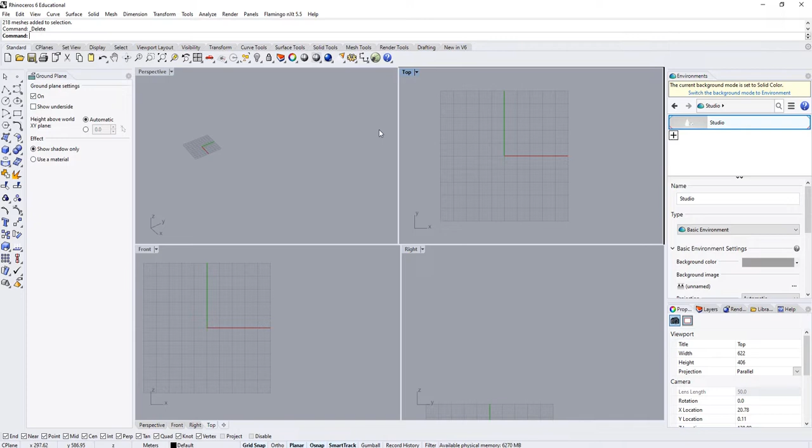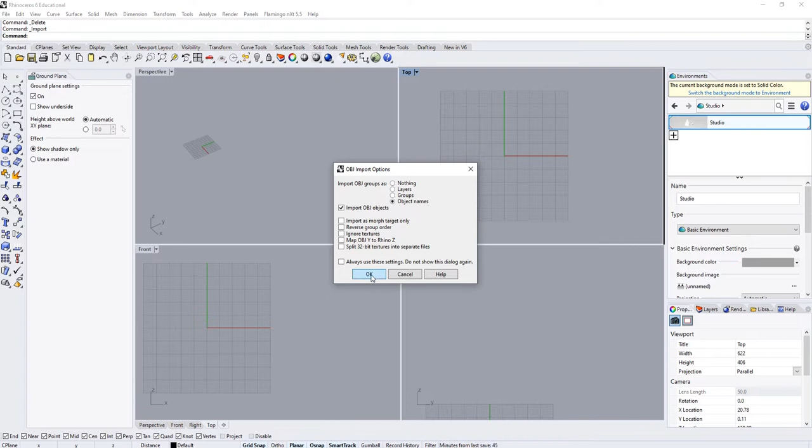So first off, we're going to start by importing everything that we just worked on in SketchUp. So we're going to go up to File. We're going to scroll down to Import, and we're going to pick the one that we just saved out. So I'm going to pick this one. It's the object file. We're going to go ahead and hit Open. Import objects. Very good. Object names. Awesome. We'll go ahead and hit OK. Great. So that just imported everything.

We can see the view is a little bit warped, so no worries. We're just going to be able to use a rotate to fix that right up. I'm going to also recommend having ortho mode on right now, just because we want to make sure that any rotation we're about to do here is a nice 90 degrees. So ortho mode right down here, we'll click and make sure that that is on.

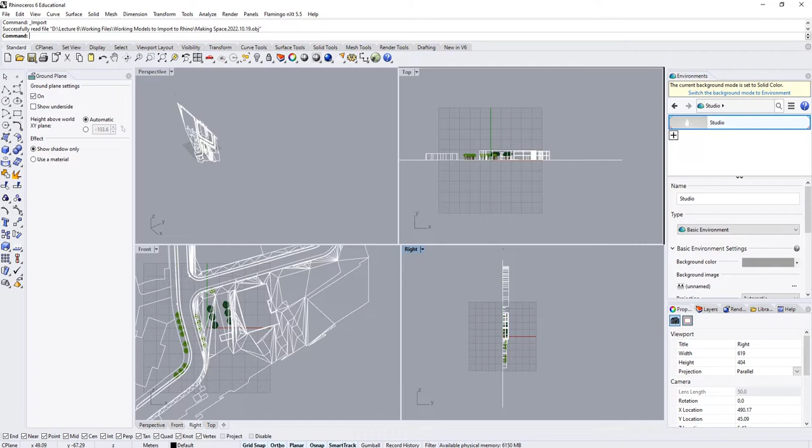So we're going to left click and drag over everything. We're going to zoom in. We're going to pick ROTATE and hit enter. And we're going to pick a point on the y-axis here, I guess, in the right view. And we're going to left click. And we're going to specify a point way out here.

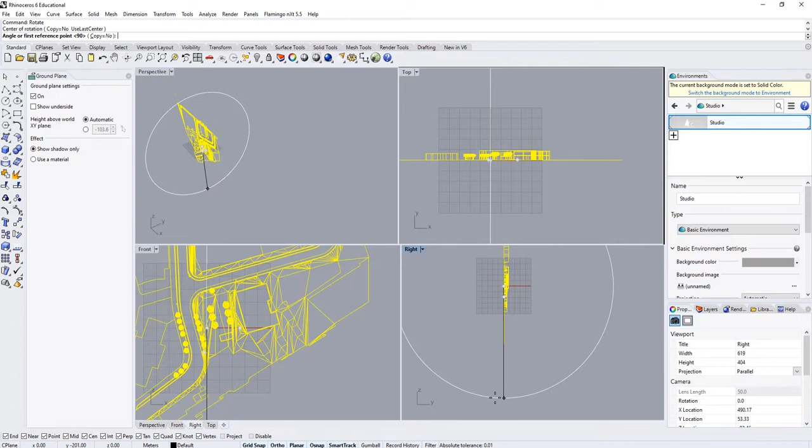And again, this is where having your ortho mode on is going to be really valuable, because you're going to stretch out and make sure you're along that axis, because you want to make sure you're grabbing everything and making it so that when you rotate it, it's all rotated and it's flat. So we'll scroll out here, we will left click, and we're going to drag, and just like that. See? Ortho mode, very valuable right now. We're just going to snap it right up like that so that it is flat on the ground plane.

Wicked. Now, before we go any further, we're going to play with our workspace a little bit. And I know that everything I just threw at you guys before, jumping around different views, is a little bit hairy and tricky at times. So we'll make a point of going through that nice and slow this time. So I'm going to suggest putting your right view at the top right portion of the screen and your top view at the bottom.

Okay, great. So once it's all tricked out like this, I think we're ready for the next step. And we've already checked and made sure that our project is in the correct units, meters. Yep, okay, we're good to go.

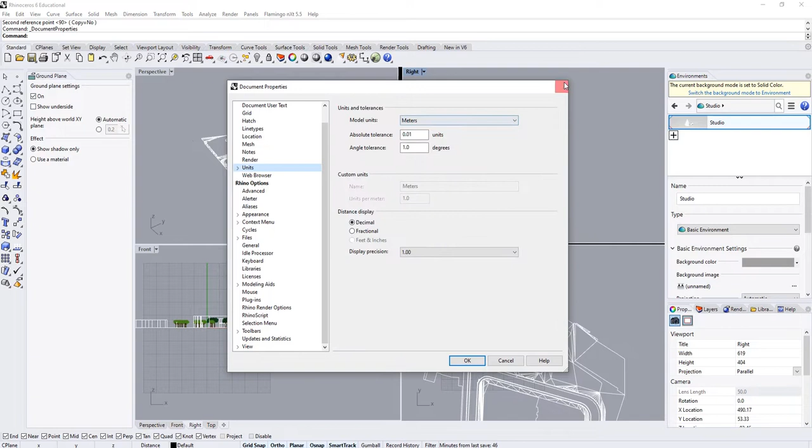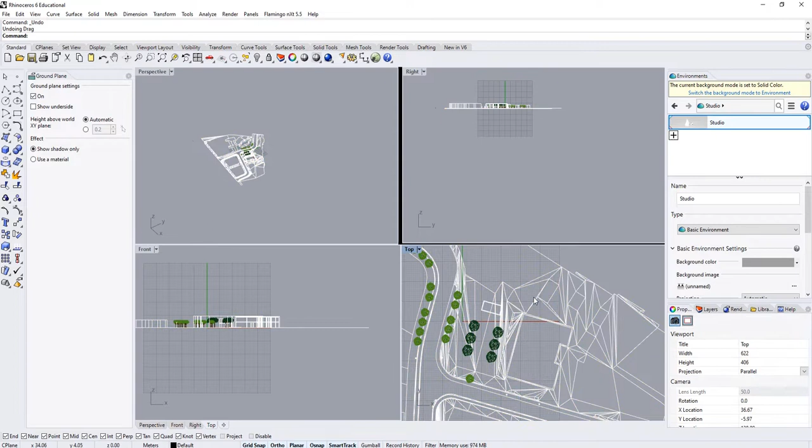So the first thing that we're going to make sure that we do here is this section that we're cutting through. Let's say that we want to create a section oblique that's essentially going to cut through this piece of the building here. The idea is we want to make sure that is congruent with the x-axis here in our top view. So we're working in the top view right now. This line here, or this face rather, needs to be congruent with that axis.

So what we're going to do is we're going to scroll out. We're going to left click and drag over everything. And the first thing we're going to do is we're going to make a move. So we're going to pick M for move, M-O-V-E, and hit enter. We'll go ahead and grab any point that essentially shares a wall with what we're going to try to be coplanar with. So we'll pick this one.

We're going to drag it up, and we're going to make sure that we're dragging it so that it is sitting somewhere on our x-axis. So we will left click. Perfect. So now this point is touching. Now we just need to rotate it so that this face is concurrent with this face. So how are we going to do that?

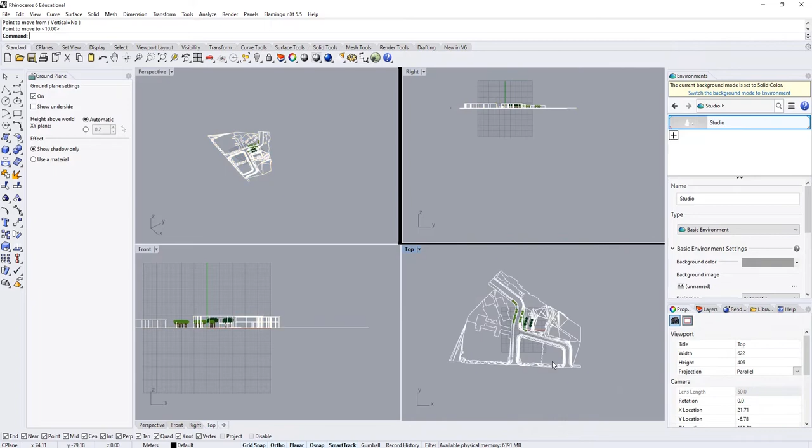We're going to left click and drag over everything. We'll zoom in. We're going to punch in rotate, so R-O-T-A-T-E, and hit enter. We're going to pick this point right here, because that's what we want to rotate around. So that's our center of rotation, just like the command line is telling us. It's asking us for center of rotation. So we will pick it.

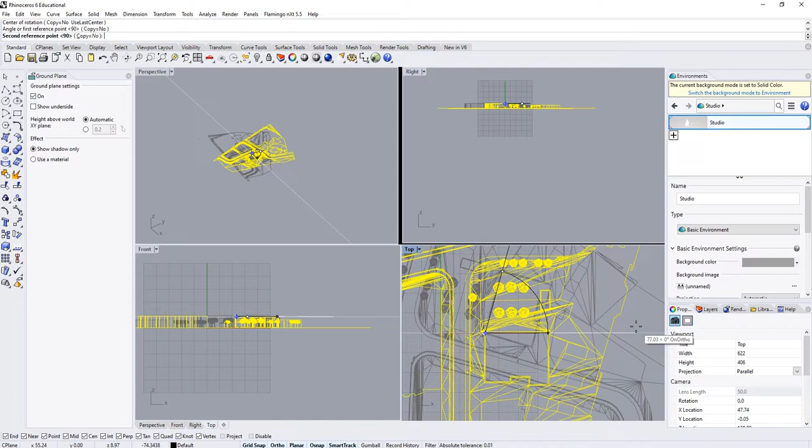We're going to scroll out. We will pick this other point here, because again, this is what we want to have meeting that axis. So we will left click and drag all the way down here. Perfect. And again, having your snaps on is really going to be useful at this stage, because as you can see, thanks to ortho mode, we're snapping right to that axis. So we'll tap left click.

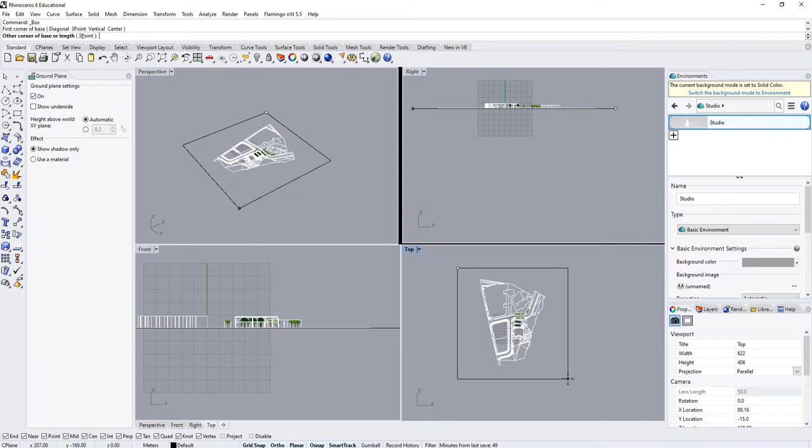We'll tap left click, and we're going to specify our two corners of our box. We're going to make sure they are essentially encapsulating all of our work inside of our project here. So we will tap left click, drag our cursor outwards so that it's now encasing everything inside of our imported model. We will tap left click once again.

Then we're going to scroll upwards once we're in our right view or front view, and we can see that we're going to give this box some actual volume. So we will tap left click. Again, it doesn't need to be sky high, it just needs to be big enough to encase everything that we've got here. Great, we've now drawn it so that it's big enough.

We're just going to go ahead and shuffle it down a little bit so that we want to make sure the ground plane of our model is handily within our box. So in order to do that, we're just going to go ahead and pick this box we've created.

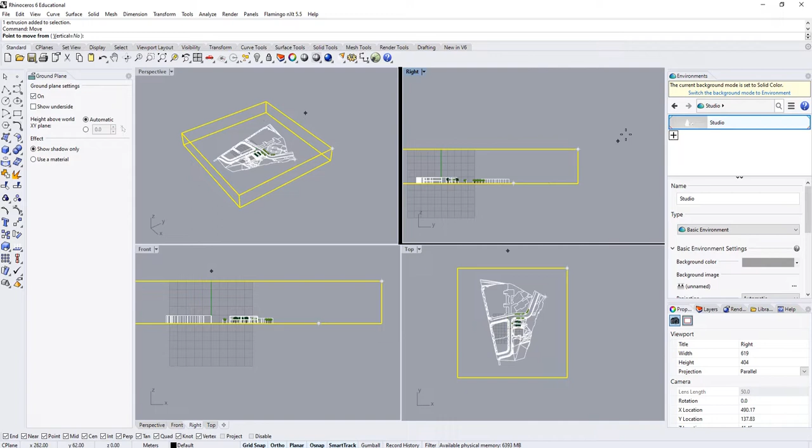We're going to tap MOVE and hit enter. Because you don't want to snap to anything you don't want to snap to, we want this to just be a nice vertical move. We're going to pick anywhere out in space here, it can be out in the front or right views. We're just going to make a point of picking a spot, and thanks to our handy ortho snaps, we're able to drag our cursor, and it'll be a nice vertical move that's straight down about this right projection. So we'll pick left click.

Great, we'll zoom in here. He doesn't need to be in here. Okay, great, so now we've got our model, and we've got it inside of our box.

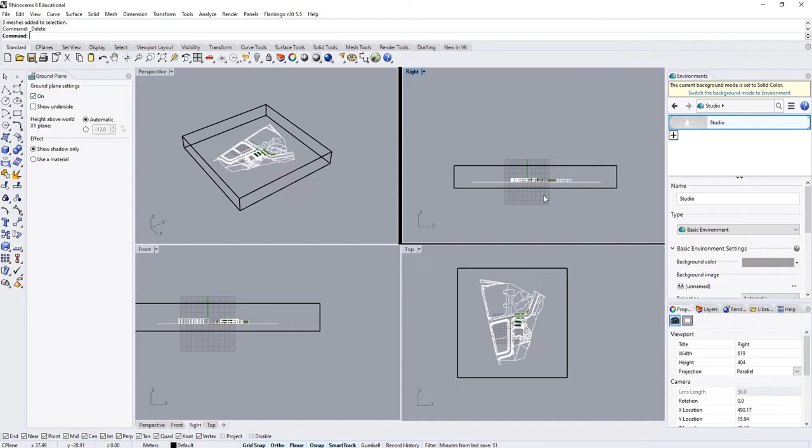Great, so right now we've got this in wireframe, so we can see all the stuff we want is inside there, so that's great. We're going to left click and drag, and we're going to group all of this together so that we'll be warping the whole mess of stuff as one. So we'll punch in GROUP and hit enter.

And now, if we try to select it, we see, oh great, that selects everything. That's perfect, that's exactly what we want. Okay, let's move over to our top view for a sec here.

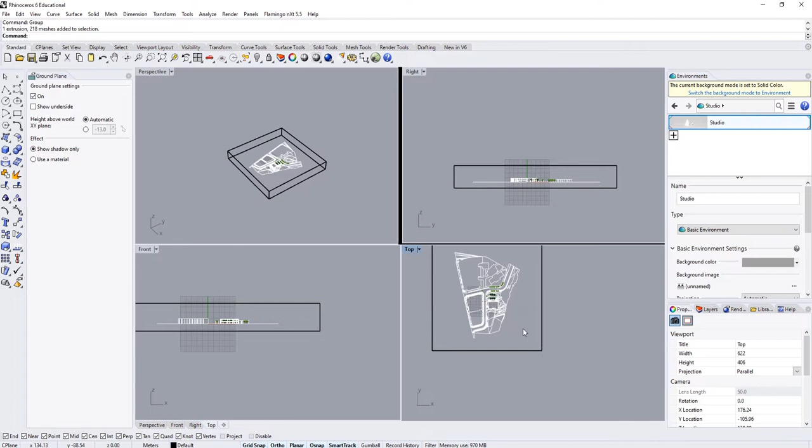So we're in our top view, and now we're going to chat about scale 1D. I know this is where the shearing and scale can get a little bit weird, so I'm going to try to go nice and slow. Again, anyone gets confused, just call out and we'll figure it out.

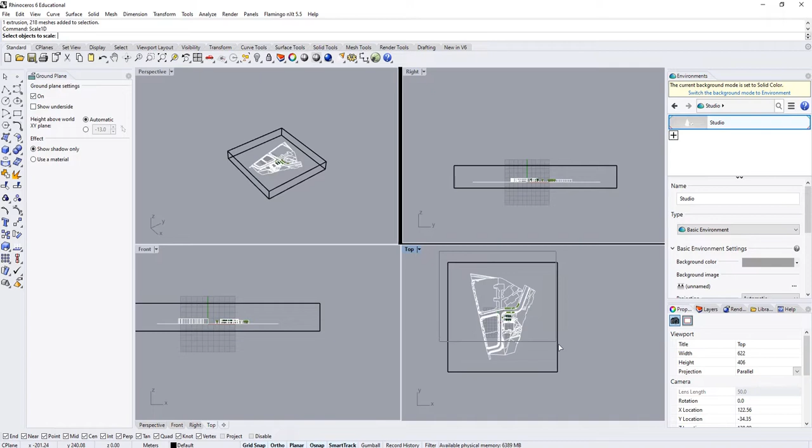So, in top view, I'm going to punch in scale 1D. We're going to hit enter. It's going to ask us to select our objects to scale. This is what we want to scale, so we're going to left click and drag over everything and hit enter. Now it's going to ask us to specify a base point.

I know this is where it's really, really valuable to have both your top view and your perspective view that you can look in. Because when I move over to my top view, I want to select the bottom left corner, but I see that I'm not actually selecting the bottom left corner if I pick this. I'm picking the top left corner rather.

So that's where, again, when I'm moving my cursor around in top view, if you guys look over in perspective view, are you able to see the cursor as it's moving around there too? Right, so basically the idea is our cursor's moving in 3 dimensions.

We want to make sure we're picking from the right spot, so we're not going to pick from this view. We're going to move over to perspective view and make sure we're for sure grabbing from the bottom left corner. We know it's the bottom left because we can see in top view that's the right spot. We're just now grabbing the bottom of the box. Great, that's exactly what we want.

Left click to pick. So once we've got that picked, we're going to swing our cursor right back over to the top view.

But now, before we do anything else, we're going to go ahead and give it our scale factor. I know one of the worst answers to any question is 'because I said so,' but 0.7075 just happens to be the number that allows you to do things at a good scale factor when you're working in meters. I'll make sure that's available to you guys for when you're trying it later on.

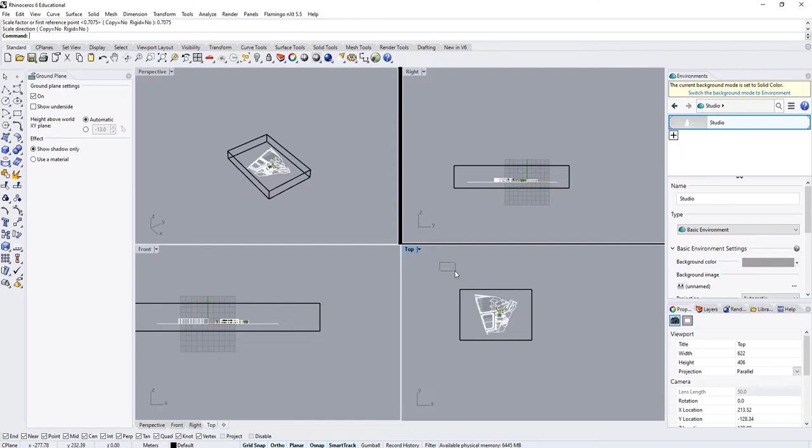So that's step one done. Now we're going to stay in our top view. Here's where we're going to get into the first shear command. So what we're going to do is, in top view, make sure all of our work is selected. Now we're going to punch in SHEAR and hit enter. Okay, so we've got the stuff we want to shear selected, and we've initiated our shear command.

Now it's going to ask us to pick our origin point. We're in top view right now, and we're going to opt to pick this point right here. But once again, it's going to be the bottom corner that we want to grab from. So again, we're in top view - yeah, that looks pretty good. But then when we look over in perspective view, we see that's actually grabbing the top corner, and we want to make sure it's grabbing the bottom corner.

So we're going to move our cursor up to perspective view. We're going to drag it down, and make sure that, yep, that is in fact the corner we're grabbing from and shearing from. So does everybody understand moving their cursor from the top view over to perspective and picking the point on the box based on that? Okay, cool. I know that can be a lot to get your head around, so if I'm going too fast on that, I do apologize.

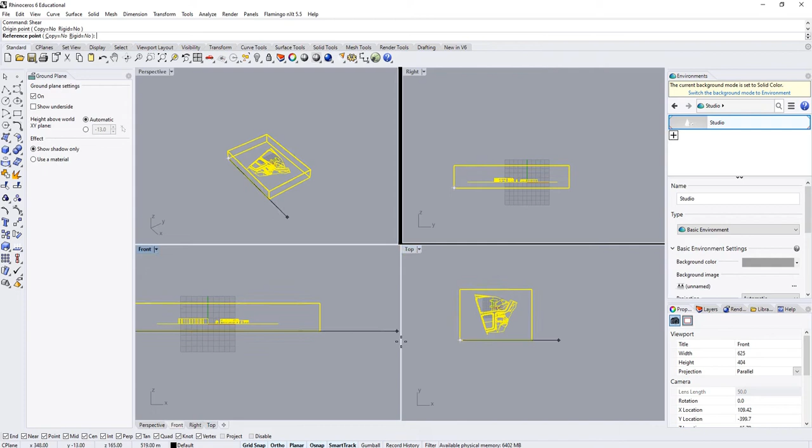We're going to drag our cursor upwards once again. Grid snaps and ortho mode are really going to be your friend at this stage. We're going to go ahead and pick it. And now here's where I'm going to suggest we turn ortho mode off just for a moment.

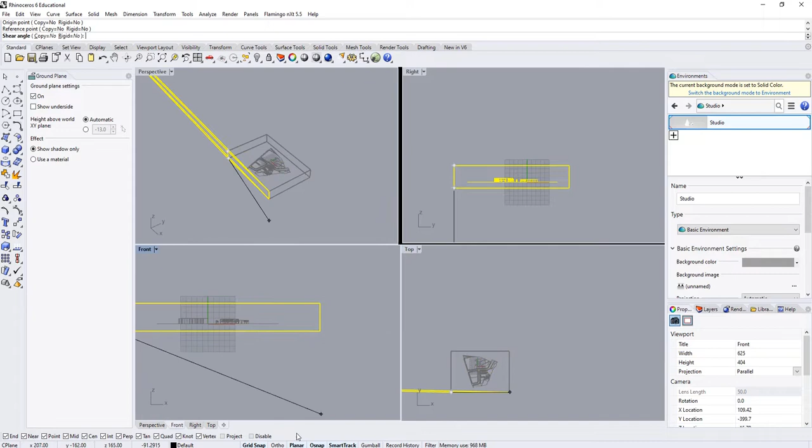And just as you can see, the way I did that is I just moved my cursor down here, and I literally just selected it once and then selected it again so it's no longer highlighted. Now, again, we're in top view. We've now specified what we're going to warp it about. Here's where, if you move your cursor to the left or to the right, it's shearing it around that specific corner, that bottom corner we just picked.

So here's where I'm going to specify a shear angle so we're not just shearing it at some weird angle. It's a very specific 45. The way I'll do that is by punching in 4 and 5 in the command alias, or in the command bar, and hitting enter.

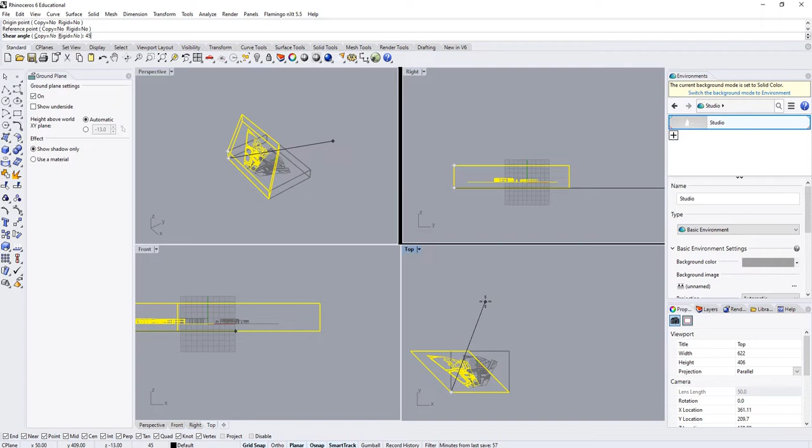Did that first shear make better sense now? Is anyone still horribly lost with the first shear step there? Okay, great.

So again, I know it doesn't really look like much of anything right now, but here's where we're going to go over to the right view, and we're going to do another select all. Again, we're just going to left click and drag over everything.

Now once again, we're going to make sure we're picking the lower left corner here. So we're going to punch in shear one more time, SHEAR, and hit enter. And we're going to drag our cursor.

As you can see, what you can see in the right view, you can see in the perspective view. So we're grabbing the bottom left from where we're being projected over in the right view, and we can tell it's at the bottom from our perspective view, which is great. So we'll pick that point.

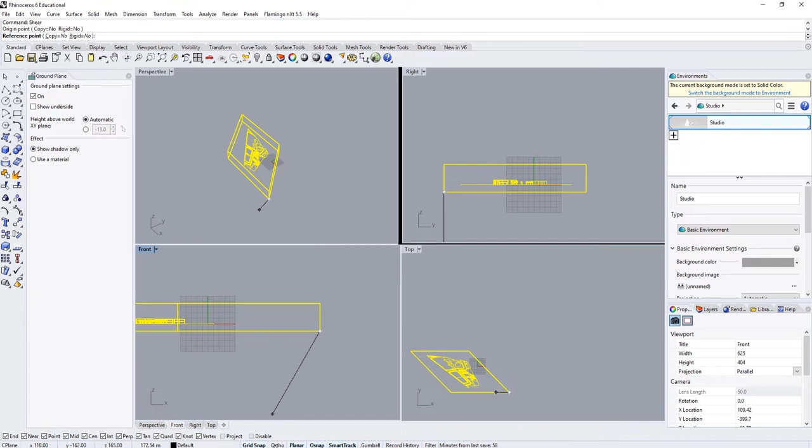We're going to tap left click and drag our cursor upwards. You can turn ortho mode back on just so we get that nice 90-degree snap. Alternatively, if you don't want to turn ortho mode back on, you can just hold shift down, and that automatically turns ortho mode on for you.

So then we're going to drag our cursor upwards so it's at a nice vertical line that is congruent with the Z axis here in the right view, and we're going to tap left click. As you can see, now it wants to shear for us again, now that we've specified that point. It's just doing that shear for us in the right view.

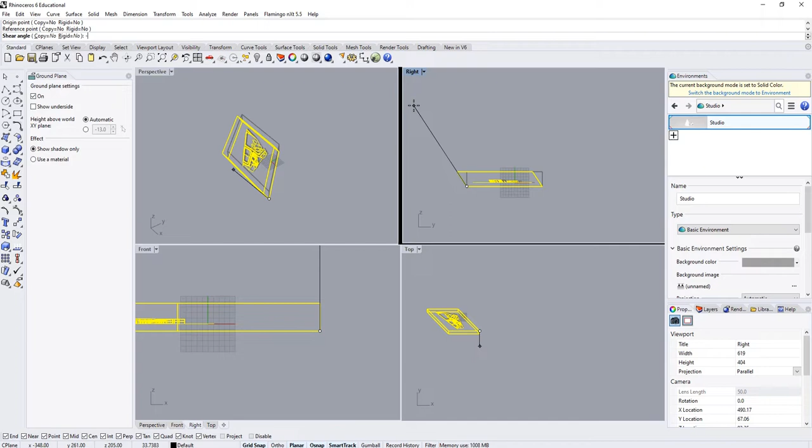So now if we punch in 45, minus and then 45, we're going to see, okay, that looks very ridiculous and crazy in the right view and the perspective view. But if we zoom in on our top view, we see, yep, that has now successfully done all of the warps that we want and shears in order to get us into

essentially an elevation oblique. So far, is that sitting a little better with everyone now? Okay, I see some nods. Wicked, awesome, good stuff.

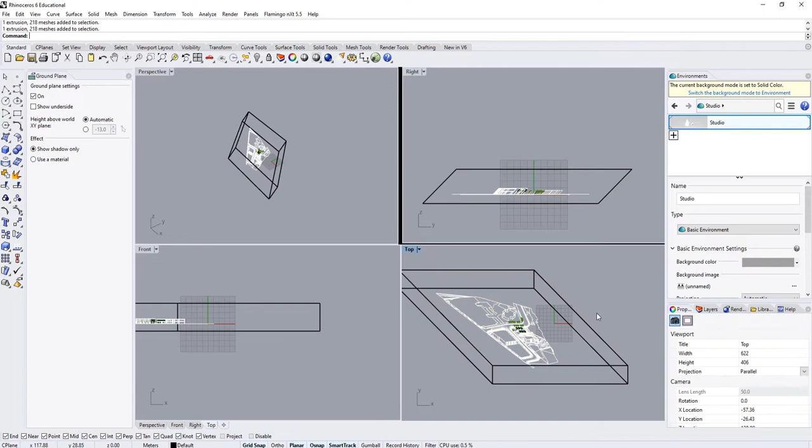So we're going to ungroup this box, and again, like the groups that we make, they're not permanent. Rhino knows we're just doing it for the sake of organization, so we will select this whole mess, and we're going to punch in ungroup in the command line, UNGROUP, and hit enter. Now that this box has served its purpose, we can just go ahead and delete it. So we'll select the box, delete, and it's gone.

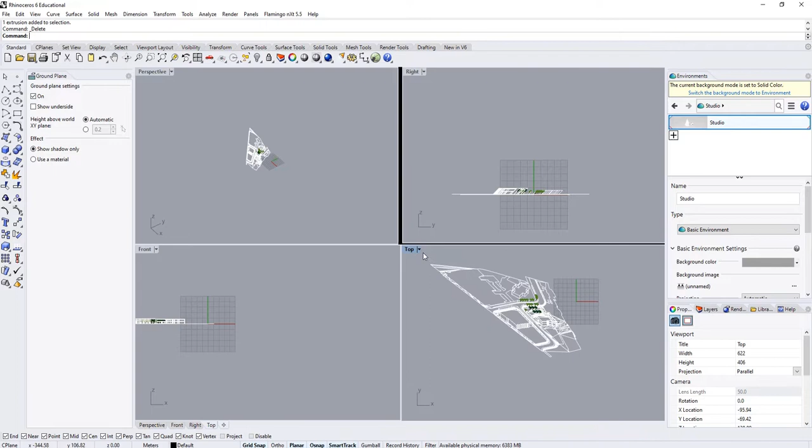So everything's looking good, but now it's time for us to take all this and essentially make it a series of 2D lines, so that we have something we can work with in CAD and then fix up later on in Illustrator. So we're going to do a left click and drag over everything, select it all, and then we're going to punch in make 2D and hit enter.

And yeah, sure enough, we're in view top, that's great. And projection, parallel, that's all good. That's what we want right now. And then we're going to move our cursor down to OK, because if your screen is somewhat matching mine, we're in good shape. So we'll go ahead and hit OK.

It'll take a minute or two to chew through that. And my video is still recording, good. Might take a minute or so, but no worries.

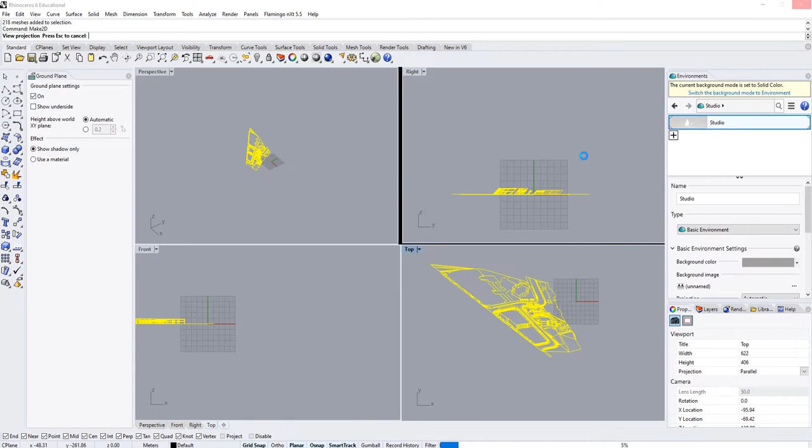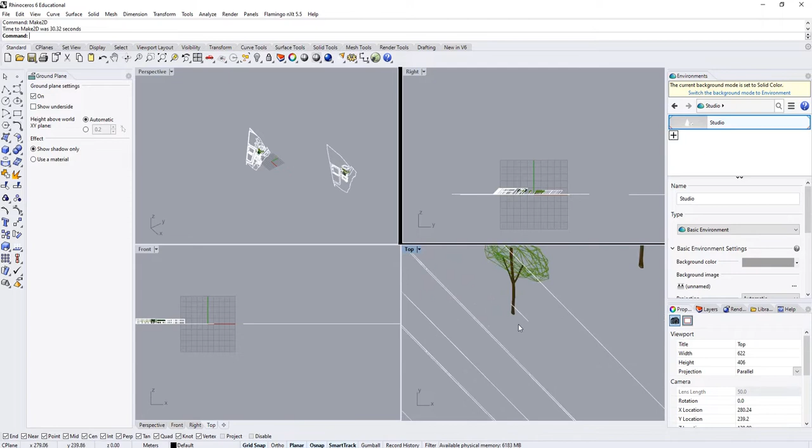Awesome. Okay, so we've got everything we want here. We see all of our light standards and stuff like that are all good to go. We're well happy with that. Now we're ready to take this right out of Rhino. So we're going to left click and drag over everything, and we're going to do a select on all these great lines that we just exported.

Now we're going to go over to File. We're going to scroll down to Export Selected, tap left click. Just for the sake of organization, we'll call this making space, and we'll make sure we give it a date, because I know we always told you guys to do that.

I should follow my own advice. I'm the worst for that, sorry.

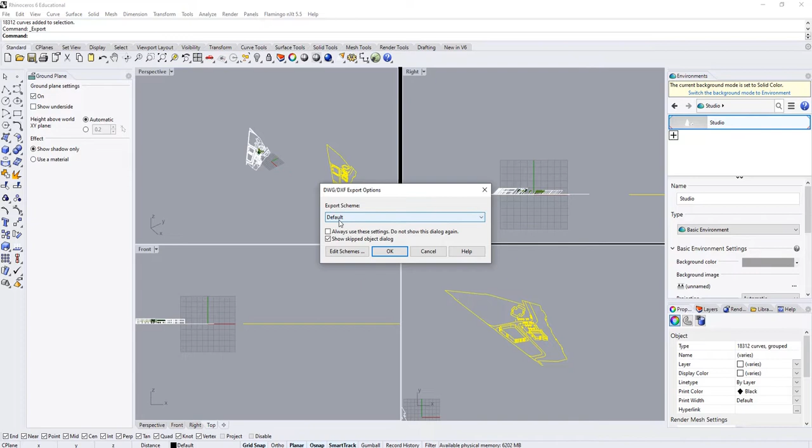But sure enough, we're for sure in a good file type here. We've got DWG, that's what we want to be exporting it as. That's all great. So we're going to move down to save. And it'll take a minute to kind of produce that. And yep, export scheme default all sounds fine to me. So we're going to go down and we're going to hit OK.

So now if we close out of this, and then we open this one, that's what we just exported. It might give you this prompt, but don't worry. That just means it came from another program. Nothing to worry about. We'll go ahead and hit continue opening DWG file. Where is everything? All right, no worries. If you have to zoom out a little bit to find your work, sure enough, there it is. It's right in here. So, awesome.

Now, same thing I'm always going on about. It is really, really worthwhile to check your units. So if we punch in units, we want to see what Rhino just spat out for us. So we're going to punch in units and hit enter. Okay, now great. It came out as in meters. So that's all perfect. That's exactly what we want. We're already off to a good start. Now if it came out in millimeters, not to worry, here's the place that you would adjust it. So we'll go ahead and hit OK.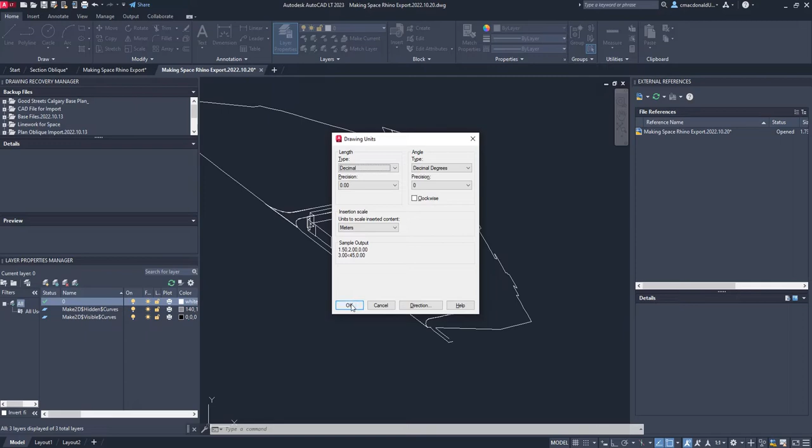Whoa, all kinds of lines and stuff like that here. Okay, awesome. Now, before you dive too far into your work, I personally recommend using the distance command to make sure everything you exported is more or less to the size that you wanted. I know that the elevation oblique can kind of warp things a little bit sometimes. Not to worry, that's why we're going to check right now.

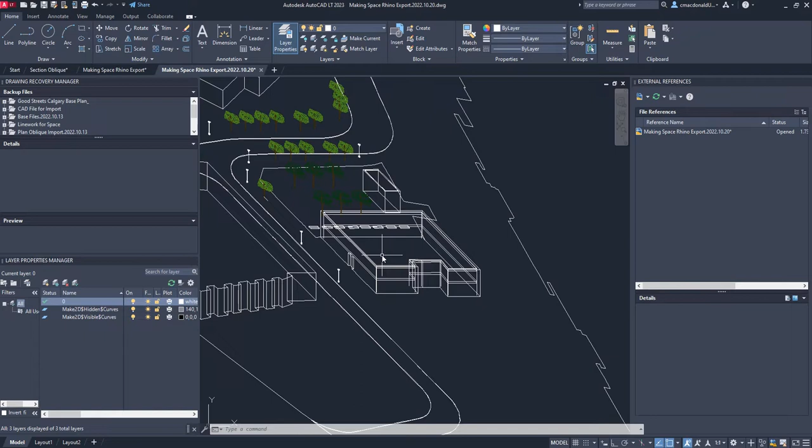So if we want to punch in distance, so DIST, and hit enter, we're going to drag over. We're going to pick a point here and pick another point, just an area that we are pretty confident in. So I see, okay, delta X 33.47. Great. So we know it's to the right size and it's in the right units. So we're off to a good start.

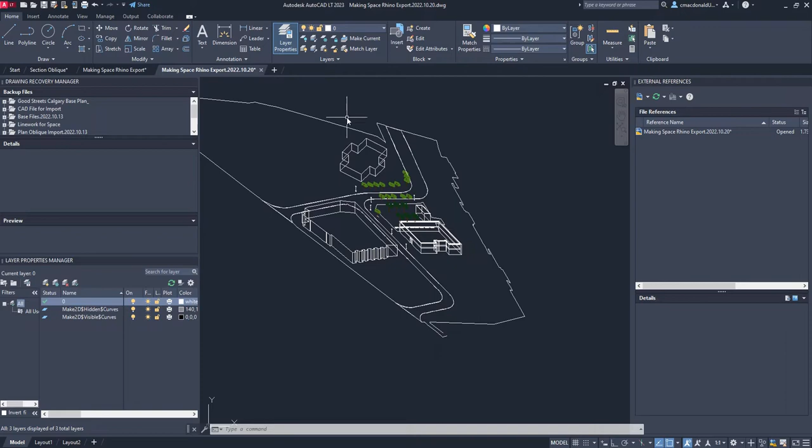Now, there's a few things I'm going to really suggest that we have in our arsenal before we dive too much further into any of this. We've checked our units. Great. We've checked our distance. Awesome. But if your work comes out a little bit slanted, not to worry. Sometimes things can do funny things when they're exporting, but we're going to make sure that this cutting plane that we're cutting through vertically is 90 degrees, so that when we create a section oblique, we're working from nice square views.

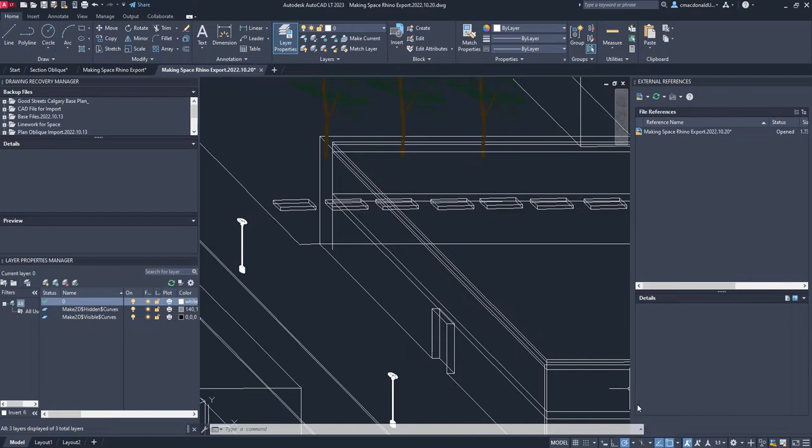So first thing I'm going to suggest we do is, once we're in CAD, we're going to move down to polar tracking, and we're going to make sure that one is turned on. But we're going to go to the right of it, and we're going to specify in the little drop-down menu to the right of polar tracking that it is for sure in 45, 90. Okay, good. As long as it's got 90 degrees in there, because 90 degrees is really going to be what we want at this stage. We make sure that that is what's selected, and I think we're good for our next step here. So, awesome.

So, I'm going to suggest also we turn our grid on, because it's just good to be oriented at this stage. Also, your snaps, I think, are going to be really valuable. So if you don't have your snaps on already, that's this icon right here, Object Snap. And as you can see, I've got them all turned on. I personally like to work with all of them on. But I'm going to for sure recommend you have your endpoints, midpoints, intersections, and perpendicular all turned on at this stage. So, okay, great.

Now I think it's a good time for us to create a little bit of a reference for ourselves, so that we're for sure knowing that our vertical elements of our model here are compatible with what we want to do. So what we're going to do is we are going to create an X line, or it's going to be like a guideline to just help us along here. So we're going to punch in XLINE and hit enter. And again, this is just going to produce an infinitely stretching guideline for us, so that we can make sure that what we're doing is all good and it's all geometrically sound.

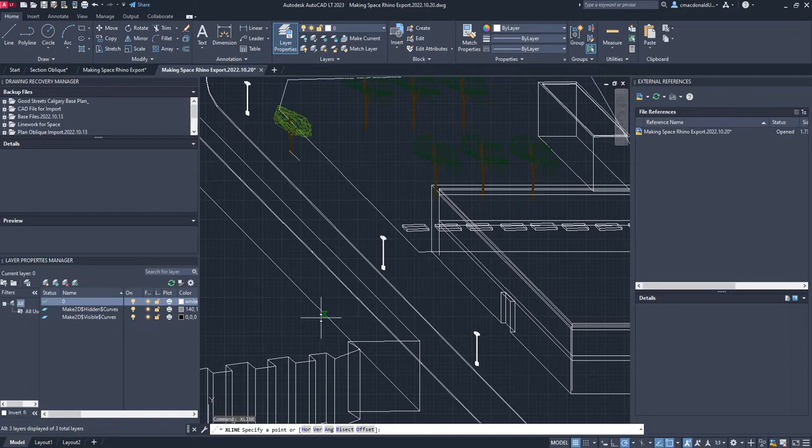So it's going to ask us what we want to specify for our X line. We're going to pick vertical, or just hit V and hit enter. And just like that, look at this. We're now able to specify a point for this vertical line that we want to add. So we'll go ahead and pick that. We're going to pick this point right in here, just to make sure that everything is for sure vertical.

Now we see that this line did come out a little bit warped at times. That's not something to be really too worried about right now. But we just want to generally make sure that this work that we have here is fairly vertical. Ooh. Oh, that's a little bit funny. Anyway, okay, great. So we see our work is vertical.

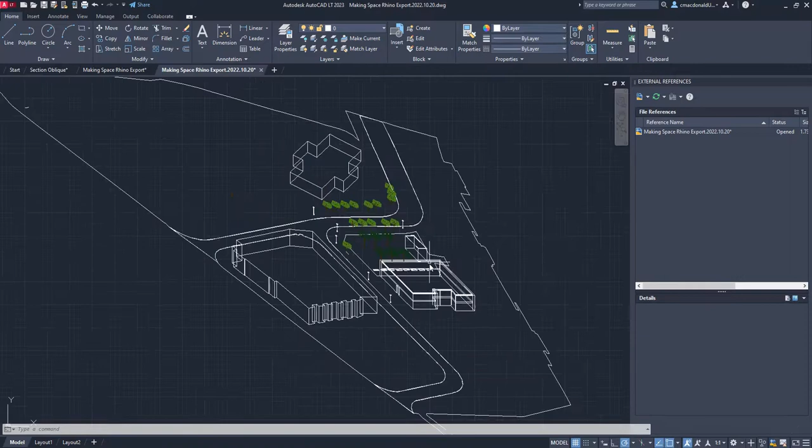That's all really great. But we want to make sure that this new line work that we're going to start creating for our section is organized. So, assuming we don't have layer or anything like that open yet, we're going to punch in LAYER to get to our layers panel. Hit enter. Once we've got our layers panel open, we're going to move up to the stack of paper here with the little sun next to it. We're going to left click, and that's going to create a new layer for us.

I'm going to recommend we call this Section Oblique layer, or whatever you wish, just for the sake of making sure it's catchy and really easy to understand. So now I'm going to move over to my color. I'm going to double click, and I'm going to change it so that it's cyan. So again, super grabby. It'll be really easy to see the work that we've done. So we'll hit OK and hit enter.

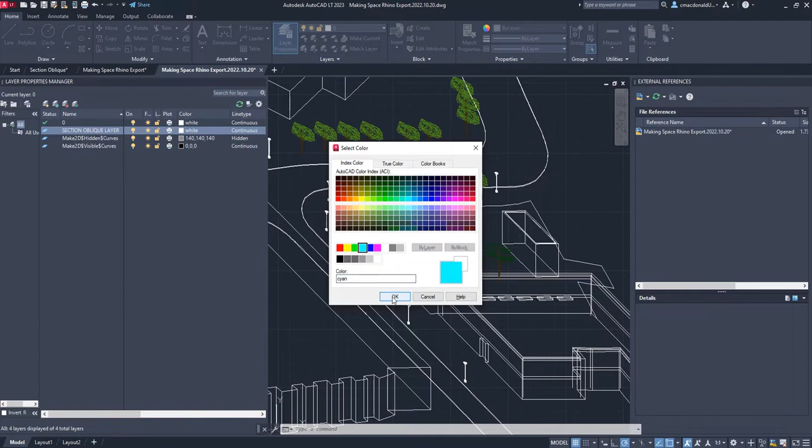Great. To make sure that layer we're working on is now active, we're going to double click our little diamond there. And from there, we've got our new Section Oblique layer actually active.

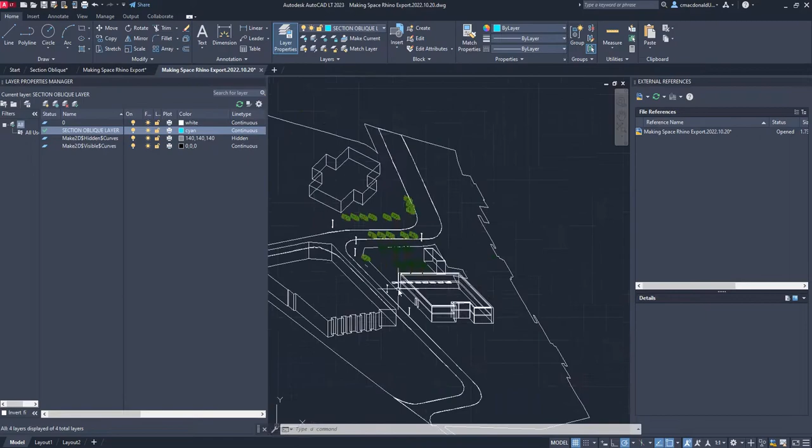Okay, so the question is, how do we get from this to something that's a little bit more like this? Well, we start here. I know I have windows and everything like that. Don't get too panicked about that. You'll be able to trick out your Rhino model as you need to. But the main idea here is we've got this nice flat ground plane that we're working from.

So the first thing you're going to do is, again, I really like the X-line guideline command because it lets you produce an infinitely long line that's perfectly horizontal. I'm going to recommend we use that to establish our ground plane right now. So we're going to punch in XLINE into our command bar again and hit enter. And then we're going to hit H for horizontal and hit enter. Great. So now we've got this infinitely stretching guideline here.

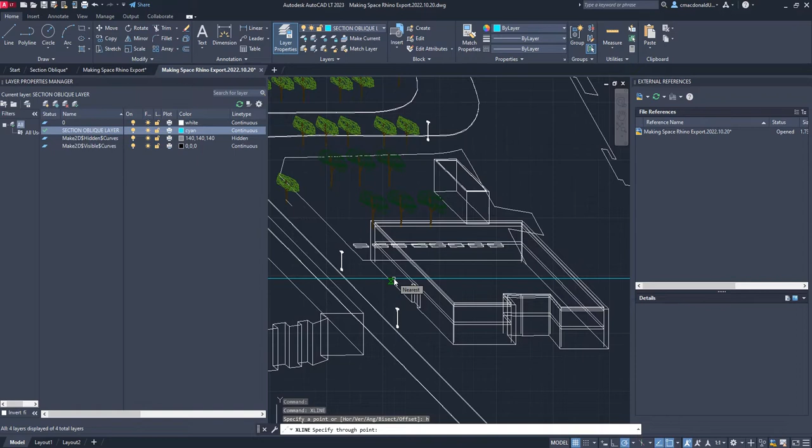Let's go ahead and pick our spot that we want to cut our section oblique through. You want to pick something that will give you enough information and still doesn't clog the page or anything. So I'm going to pick something that's fairly close to this nice flat line that we've got up here. This seems like a good spot to me. So I'm going to left click and pick that spot right there and hit escape now that I'm done picking that line.

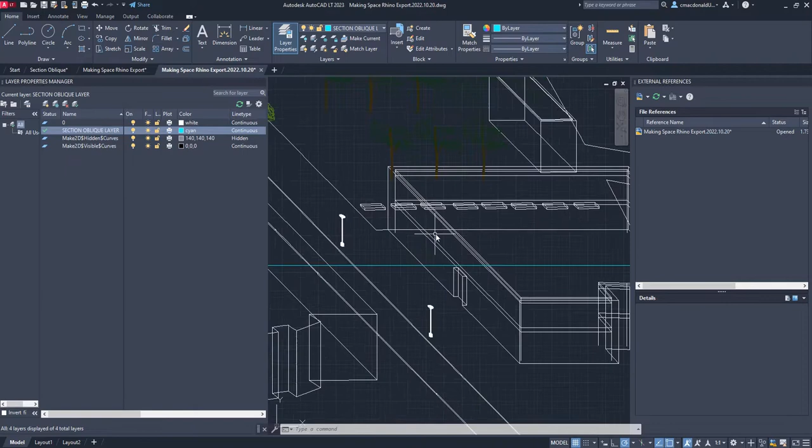Great. So here's what I'm also going to recommend. There are some lines that we want to make sure that we're going to bring over with us. A lot of these lines are going to be hidden, but some of these lines are going to be pretty darn important to make sure that we have them on our section oblique layer with us. First one I'm going to recommend is any kind of heavy line work that defines the exterior of this building.

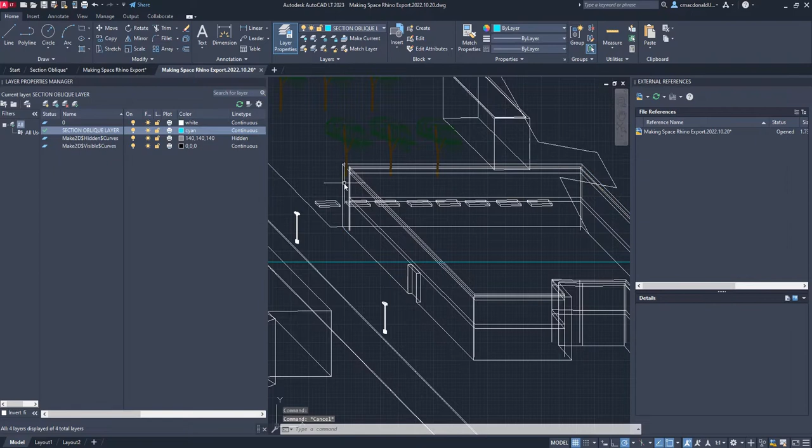So you notice that when I pick this, oh no, it's all one big piece. That's not really what we want right now. So if your lines here come out as a big polyline, I personally recommend exploding that, because we're going to want to be able to grab different lines. So I'm going to select that line, punch in EXPLODE and hit enter. And great, now it's exploded.

That's awesome. So now we're going to grab a few of these lines here, and we're going to make sure that they are coming over to our section oblique layer. The reason being, we want to make sure these lines are really easy to see. For right now, this is the top corner of the building. We want to make sure that is super obvious to us as we start drawing our section.

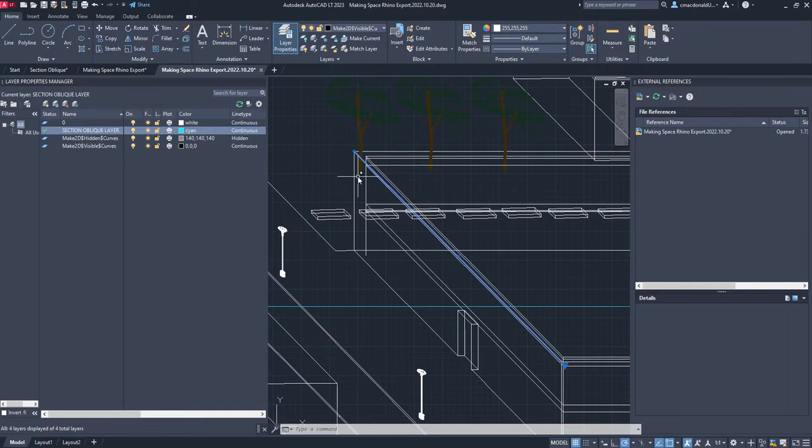So we're going to grab this line, these lines, really any key line work that is going to be relevant to us, that we want to make sure we're extending our lines to meet once we actually start drawing our section. Okay, awesome. I can continue as I need to. But once I've got those all selected, I can move up to my layers panel, go to the drop down, and move down to section oblique layer, just like that.

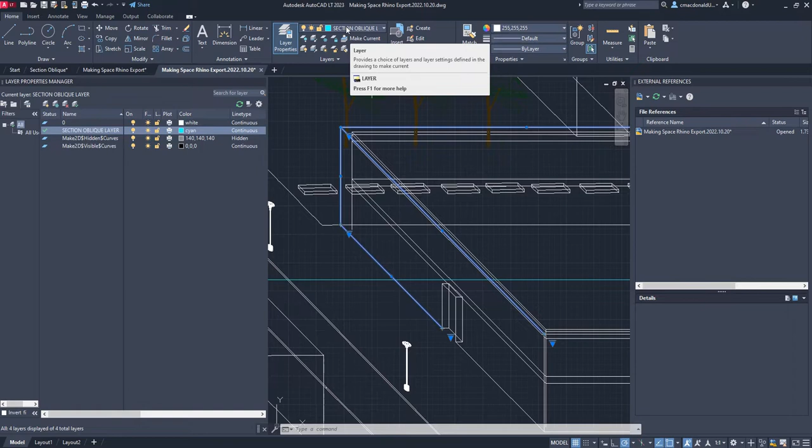Also, I know we've talked a little bit about true colors, but you might notice in the case that your line work doesn't reflect the color of the layer, here's why. If you've just exported it from Rhino, it might do something funny with your CAD color lines. So you're going to move over to the Properties panel, and you see here how it gives me 255 like this. That's it showing its true color.

That's something we don't need to worry about too much at this stage, but we're going to go to the drop down here and make sure it's set to by layer. So now it's actually showing those lines based on the layer that they're on. So that's all great.

We need to start actually drawing in some lines to give this thing some substance. If this line was cutting through this chunk of the wall, there'd be a projecting vertical line that it was producing too, right? Because it's cutting through a thick wall. We've got to draw that wall out. So we're going to go to our line tool and make sure that we're working in our section oblique layer. Here's where I was saying that your intersection snap is really valuable.

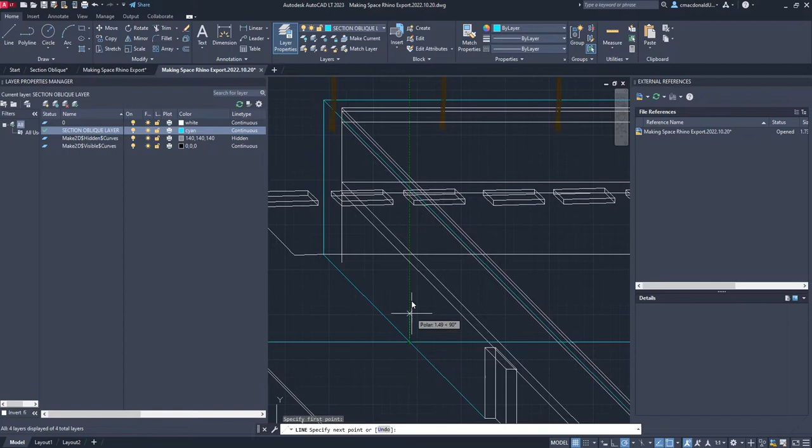We're going to pick that point and drag our cursor upwards. And again, here's also where having polar tracking on is really valuable. We're able to drag it up so now it's meeting the top of the corner where this wall would be cut through. So we'll pick that point right there and hit escape. But since this cut line would essentially stop at that point, because we've passed the peak of the wall it's cut through, we're going to trim that up a little bit.

So we're going to use our trim command to trim this extra little piece of line that goes beyond the wall that we're trying to cut through. Let me show you something cool about the trim command that maybe we haven't talked about as much yet. We're going to punch in TRIM and hit enter.

Now, in the past, I know I always suggest using cutting edges because I think it's just a faster and a clearer way of getting an idea of what you're cutting from and with. But if you're working in AutoCAD 2023, by just punching in trim and not specifying any further commands, CAD will naturally just let you trim around whatever line it sees it intersecting with. So right now, if I move my cursor over to this without selecting anything further, CAD knows, hey, those lines are all coplanar. You're probably trying to trim this away. Let me just intuitively do that for you.

So if I go ahead and pick that, and again, all I really did there, I'll go ahead and do Control-Z again, is I just punched TRIM and hit Enter. I didn't bother hitting T this time. I just moved my cursor up, and in its natural default state, CAD will let you trim any of those extra lines that you don't need anymore. For now, I'm done that trim command, so we'll hit Enter.

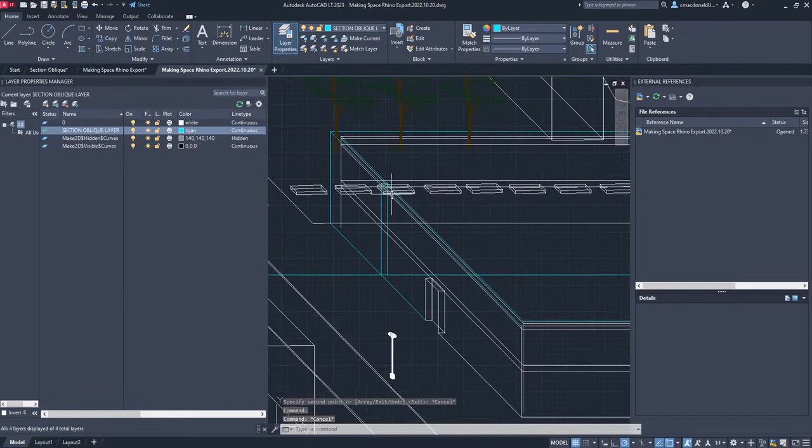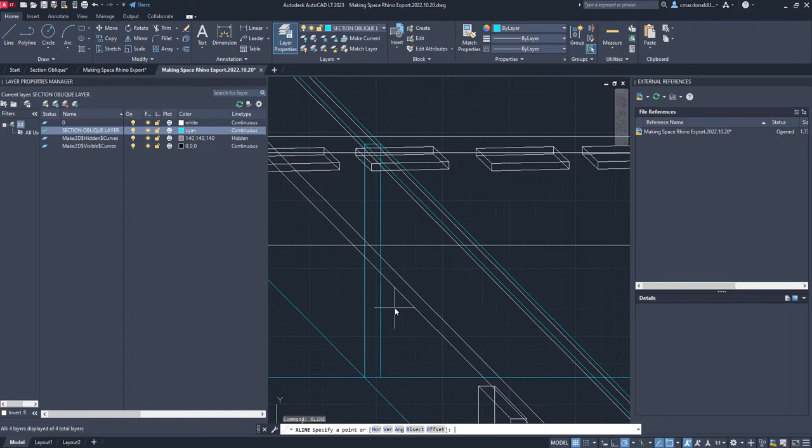Now, because these lines are vertical and everything, I'm going to recommend we take another X line to serve as a guideline, and we're going to draw it all the way across, because we want to make sure that these lines are horizontal when we're drawing our X line. So we're going to punch in X line once again and hit Enter, and we're going to hit H to specify a horizontal line is what we want. So we'll hit Enter, and we're going to zoom in a little bit here.

Now have a look at this right now. You see that I've kind of got the inside, this inside lip here.

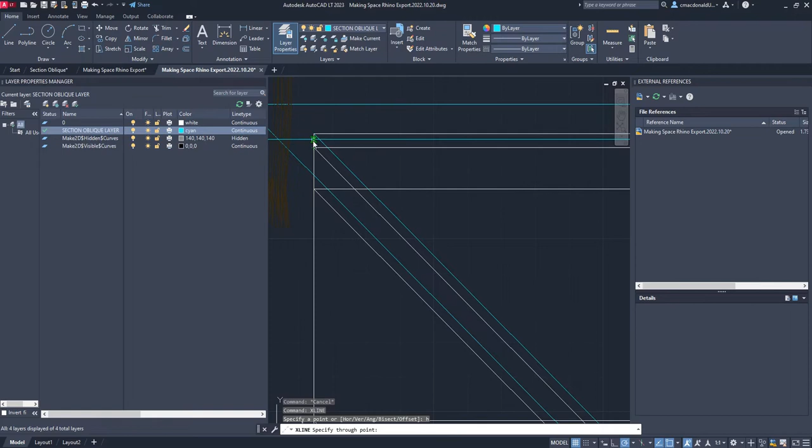That basically just means that here's where this piece in here was the top of my roof system, and then this piece in here was the little bit of difference where, again, the lip of the building and the scuppers might have gone. So I see here, if I drag along here to where essentially this cut line is happening and meeting, we see that that's essentially where there would be that little bit of a drop down, and then our roof and everything. So we'll go ahead and pick that.

And great. Again, I know this is a lot of lines right now, but then if we zoom over here, we see that if we were to start drawing this line, assuming this is a section cut, then this piece will start cantilevering off of this piece, and we can start drawing our wall in that way. So that's exactly what we're going to do right now.

We're going to make a new line. We're going to pick a point where this intersects, because again, this is where our section cut would intersect. We're going to left click and drag upwards. Thanks to polar snapping, we're able to see where that goes. And tap left click. And we'll go ahead and trim this, because we know that once it's cut through this, it wouldn't keep extending. So we'll punch in TRIM and hit Enter and tap left click.

Great. And again, since it's a nice horizontal ground plane, we're going to go ahead and pick this point, drag across here, and thanks to snapping, we can see what that would look like once we actually cut through the middle part. So we're going to tap trim one more time. You're going to be using your trim tool a lot at this stage. That's totally okay. And then we are going to draw the horizontal component, because essentially this line has to actually stop at some other point here. So let's go ahead and do that right now.

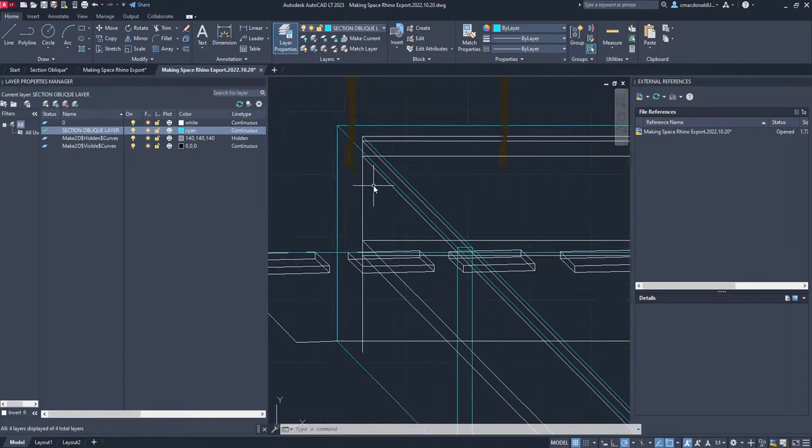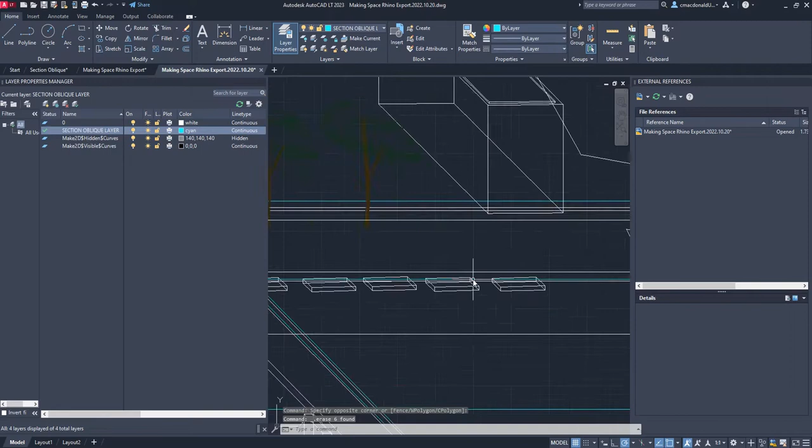Okay, so let's see what we can do here next. We can definitely clean a lot of this stuff up in the background. Again, this is just the way things imported with wireframe. You can go through this and delete as you need to. And keep in mind, here's why I suggested moving the outside of the building over straight away. Because right now you can see this is the outside of the building, so everything behind this is totally irrelevant to our work. So we can just go ahead and delete this stuff. We don't need it because it would be totally invisible to us in this section view. So there's certainly going to be a big element of cleaning your work up as you go through all this.

Hold on, I don't want to delete anything that's in blue lines. So, you sort of get the idea.

Here's where importing it in Rhino as Make 2D is kind of valuable. Notice these two lines right here? Those were essentially the top and bottom of our roof system. We've already drawn the top in, but now it's time for us to draw the bottom. Let's do something with that right now.

We're going to punch in XL, X for X line, and hit enter. We're going to specify H for horizontal, so that we draw a nice horizontal line. Then we'll have a look, and yep, this is the bottom of that roof system. Here's where it cuts through our line, where it meets this wall section that we've already cut. So we're going to go ahead and pick that point right now.

Great, so now we've got a top of this ceiling, and we've got a bottom of the ceiling. This is all good, but we want to make sure we're trimming everything too. We drew the actual line here, but we're going to make sure we also draw the actual wall all the way to the ground.

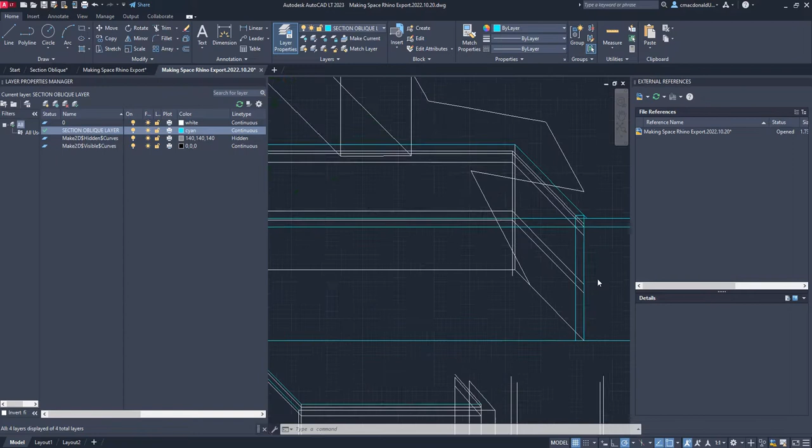So this is all coming along, looking good. We're going to get into cleaning it up more in a second, but for right now, we want to make sure, especially in our section view, that we're blocking in our floor systems, because we included a cool floor system in our model, and this is a great way to reflect that. Section-Obliques can do an awesome job of reflecting that kind of stuff.

Again, we're going to pull up our X line command, hit enter, and specify H for horizontal once again. As you can see, because of where we drew our cut line from, and how things shook out in our model, here's essentially where those lines of the second floor are, the top and the bottom of the floor, in relation to our work. So we're going to go ahead and pick both of those spots.

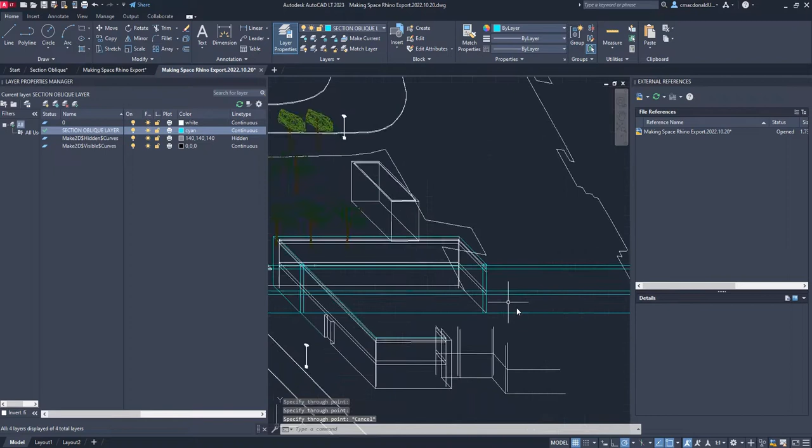Now, we don't need these extra big, super long lines. So once again, we're going to hop back on our trim tool and hit enter. We're going to get rid of this guy, and this guy, and just for the heck of it, let's go ahead and get rid of all this stuff right now too.

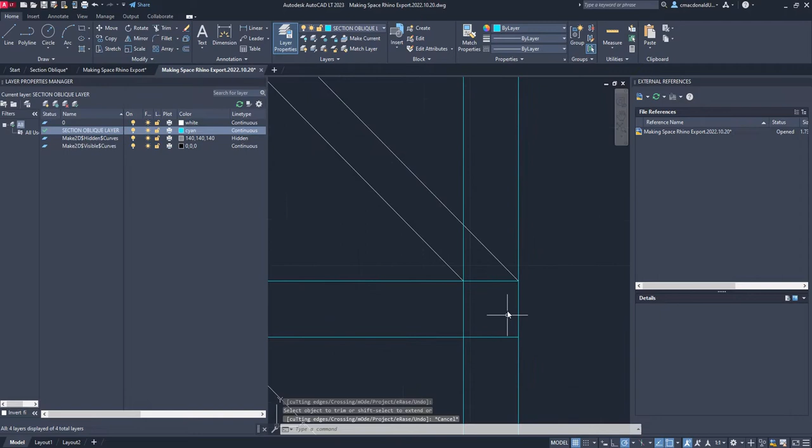So there's going to be plenty of cleaning involved. But that's okay, that's kind of what it's about at this stage. We'll clean all this out because, again, all this would be invisible. And there's going to be a fair bit of moving stuff over based on what relevant lines you want to keep and what lines you don't.

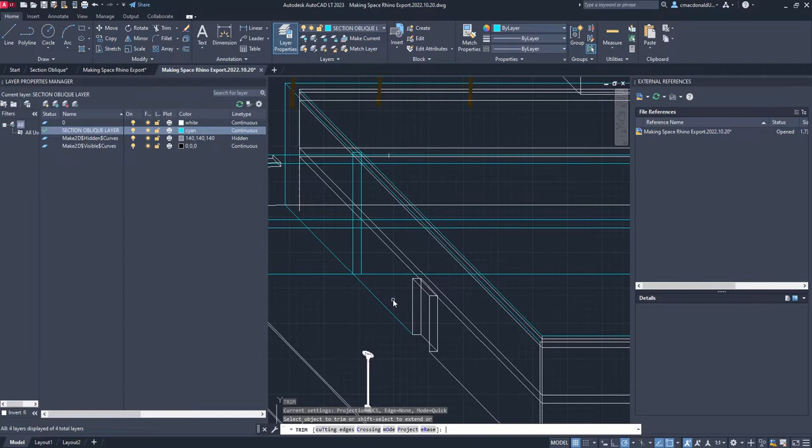Just so that this section is a little bit less busy, let's go ahead and do a little cleaning of it right now. We'll do some trimming because this is all going to go. We can get rid of all this stuff because anything in front of our section cut line is now totally irrelevant. It's being blown off the face of the earth, we don't need it anymore.

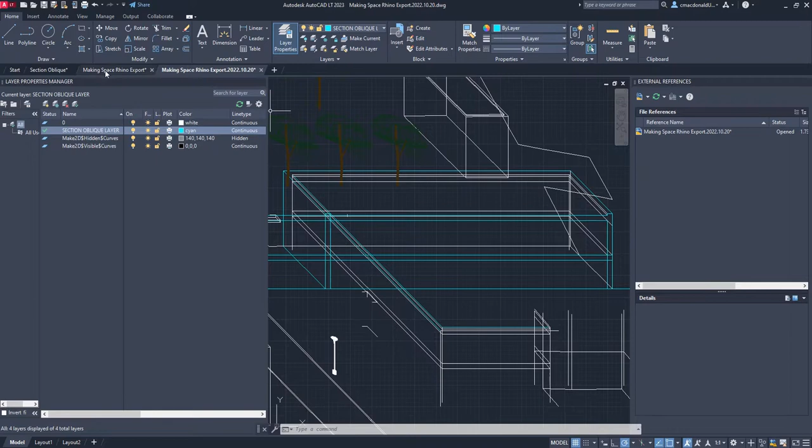So basically, you're going to get a chance to continue drawing and using cutting and trimming to essentially continue refining your section until eventually it's looking a little bit more like this, in terms of trimming things and fine-tuning them as you go along. It's a little bit tedious, but if you've got the trim command down and you've already got your work drawn up in Section Oblique, you should be A-okay.